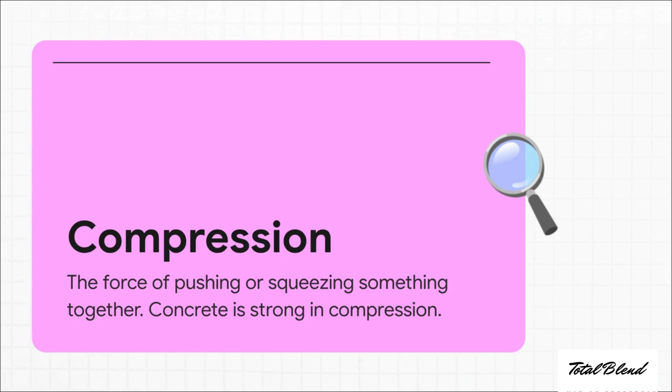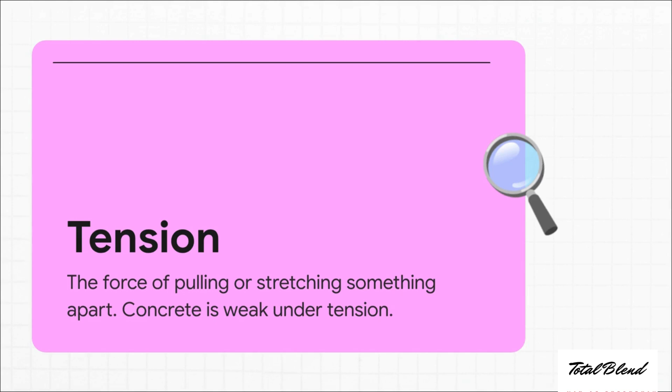But here it is, that fatal flaw. The moment you try to pull concrete apart, or even just bend it, it fails spectacularly. This pulling force is called tension, and under tension, concrete is just brittle. It cracks almost instantly. Imagine a simple concrete plank trying to span a small gap. Without any support, it would just snap right in the middle. This weakness makes it pretty much useless on its own for things like floors or bridge decks.

So if concrete can't handle being pulled or stretched, how in the world do we build with it? Well, you find it a partner that's strong in exactly the way that concrete is weak. This is where we get to create a real construction superhero. And that perfect partner is steel. Steel reinforcement bars. You've probably heard of them called rebar. They are basically the mirror image of concrete. They have incredible tensile strength. You can pull on them all day long and they just hold firm.

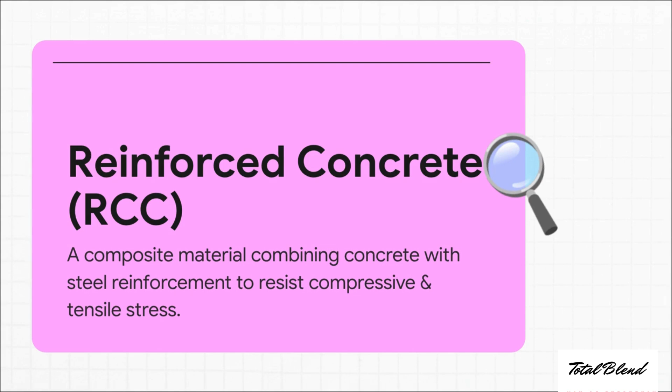So this led to a really simple but absolutely revolutionary idea. What if we just combine the two? And the result is what we call reinforced cement concrete, or RCC. It's a composite material, which just means it's made of 2 different things. You embed the steel bars inside the concrete before it hardens, so the concrete handles all the compression, the pushing forces, while the steel hidden inside handles all the tension, the pulling forces. It's perfect. Each partner covers the other's weakness. They form the perfect team.

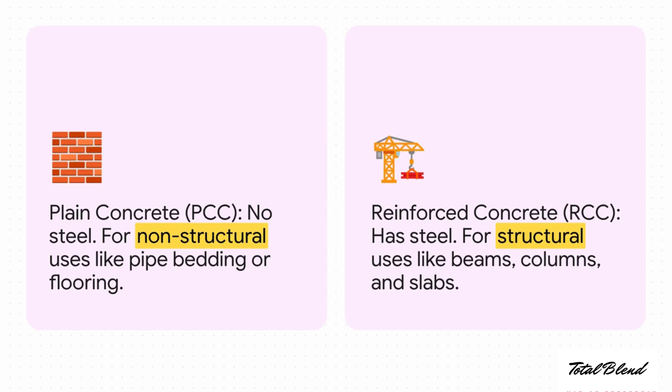So what does this team-up actually look like in the real world? How much of a difference does adding a little bit of steel really make? Well, the answer is everything. Just at a glance, the difference is like night and day. Plain cement concrete, or PCC, has 0 steel. It's used for stuff that doesn't really need to bear a major load, like leveling a surface or maybe as a bed for some pipes. But RCC, with its steel core, that's designed for serious structural use. The beams, the columns, the slabs, all the things that actually hold our buildings up.

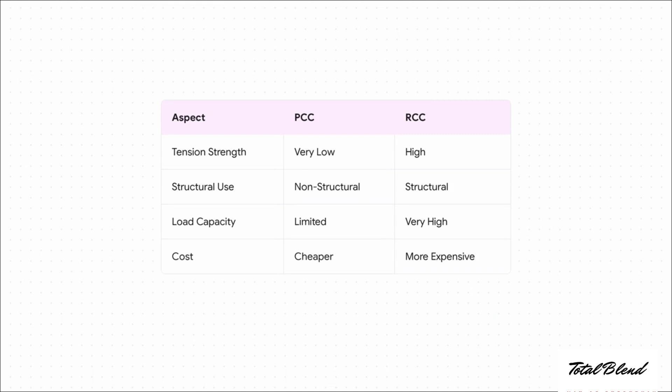And when you look at the details, the differences are just stark. Check out the tension strength. PCC is super low, while RCC is high. And that single change dramatically boosts its load-carrying capacity from limited to very high. It's this simple addition of steel that takes concrete from being just a simple filler material to being the primary building block of our entire world.

So, if you take just one thing away from this whole comparison, let it be this. PCC is for jobs where there's no stretching or bending involved. RCC is for everything that has to stand up, span a distance, and carry a serious load. One is basically filler, the other is the skeleton. But look, creating this powerful material is only half the battle. To make sure our buildings are actually safe and that they're going to last for generations, using RCC correctly means you have to follow 3 fundamental rules.

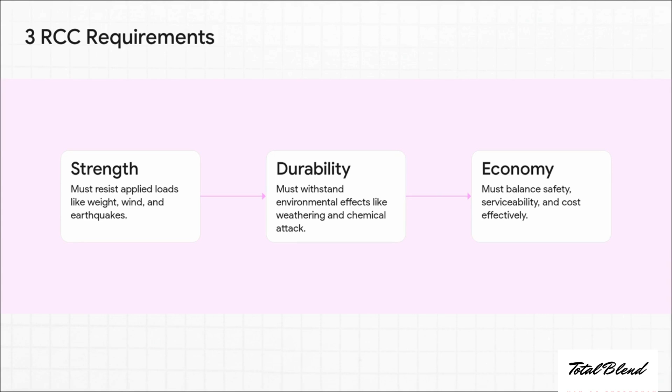So, to get it right, engineers follow 3 main rules. First, it has to have strength, enough to resist all the forces acting on it, from its own weight to things like wind and earthquakes. But strength isn't enough. It also needs durability, so it can withstand the test of time against weathering and chemical attacks. And finally, you have to balance those 2 with economy. A design has to be safe and functional without being wasteful. You see, over-designing costs a fortune, but under-designing, well, that's a catastrophe. It's a really critical balancing act.

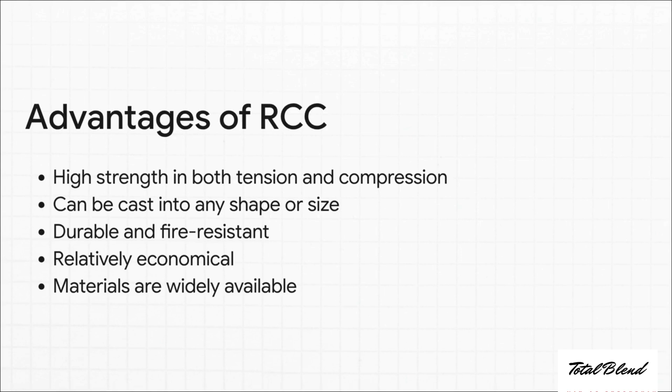So, with all that in mind, let's wrap this up with a final verdict. We know RCC is the backbone of our world, but like any technology, it's got some incredible advantages and also some pretty significant limitations. The list of pros is pretty impressive. It's got that critical dual strength against both pushing and pulling forces. It's also incredibly versatile. You can pour it into molds to create almost any shape you can imagine. And on top of all that, it's durable, it's fire resistant, and because the raw materials are everywhere, it's also relatively economical. But, of course, it's not perfect.

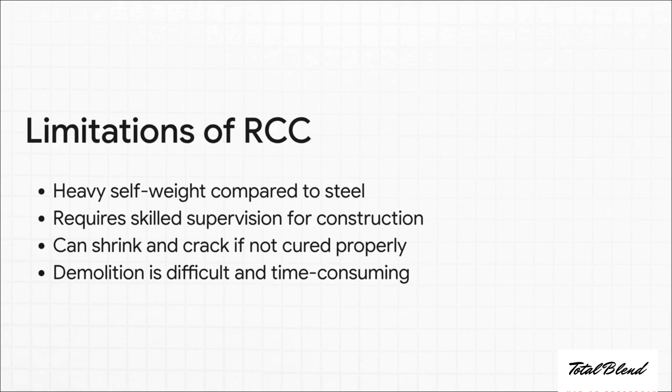RCC is extremely heavy, which means the structure has to be strong enough just to support its own massive weight. It also requires skilled labor to get the mix right, place the steel correctly, and cure it properly. If that's not done well, it can shrink and crack. And anyone who's ever seen a building being demolished knows it's a difficult, super time-consuming process.

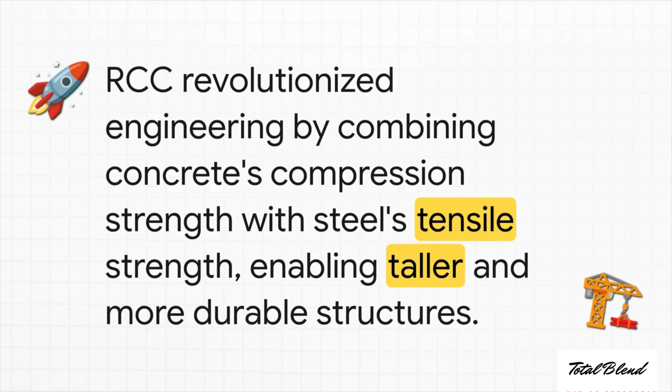Ultimately, though, the impact is just undeniable. By so cleverly combining the compressive strength of concrete with the tensile strength of steel, RCC completely revolutionized construction. It's what allowed us to build taller skyscrapers, span wider rivers, and create infrastructure that's more durable than anything that ever came before it. Really, the world we all see today is in so many ways a testament to this simple yet absolutely brilliant combination of concrete and steel. It solved a fundamental problem and unlocked these incredible new possibilities. Which leaves us with a final thought. What's the next revolutionary material that's going to shape the world of tomorrow?